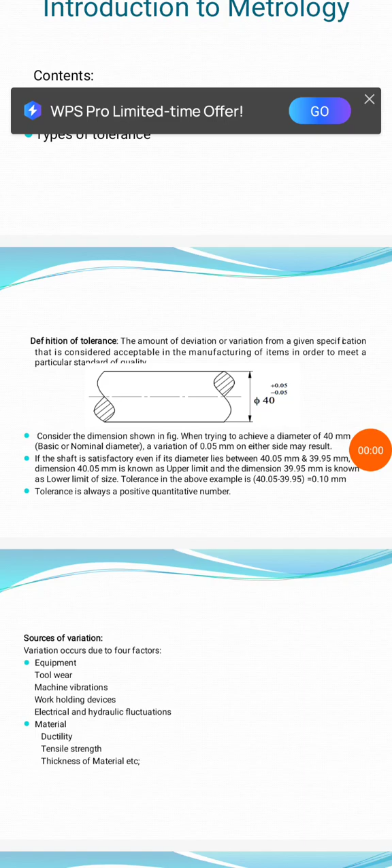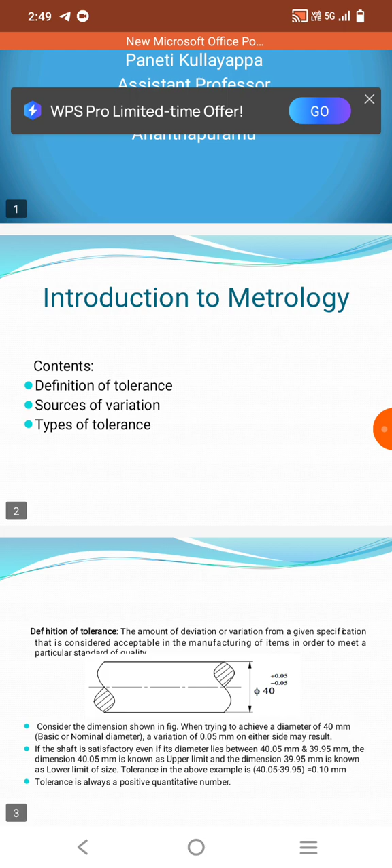I am going to tell you about introduction to metrology. In the introduction to metrology, first you should know what is the importance of metrology. Metrology deals with the measurement system, and we require measurement systems everywhere, and this measurement system ensures the quality of the product.

For example, all finished products have to be checked for their dimensions before they are installed. So we should check the dimensions of the product, and this is very important. We should ensure the quality, whether this particular product is within the prescribed dimensions or not. That's why we should study metrology.

Now coming to this particular class, I will cover three contents: one is the definition of tolerance, another is sources of variation, and the last point is types of tolerance. Before talking about the definition of tolerance, we should know...

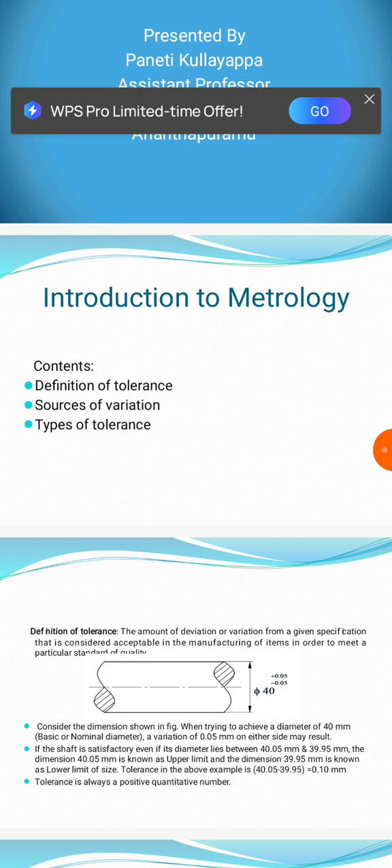For example, when you look at this particular figure, whenever you want to produce a cylindrical product with a diameter of 40 mm, as said earlier, we cannot exactly manufacture to 40 mm, so we allow some sort of variation or deviation.

For example, 40 plus or minus 0.05. For the upper limit, we will have 40 plus 0.05, that is 40.05 mm, and the lower limit for the product will be 40 minus 0.05, that is 39.95 mm. So the original diameter of the product, 40 mm, lies within this range. Though you produce n number of products within this range, 39.95 mm to 40.05 mm, the function of the product does not get affected.

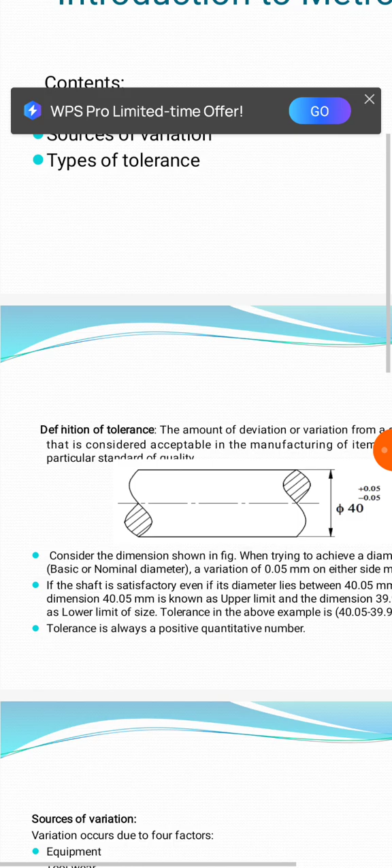So this is the importance of giving or providing tolerance for a particular product.

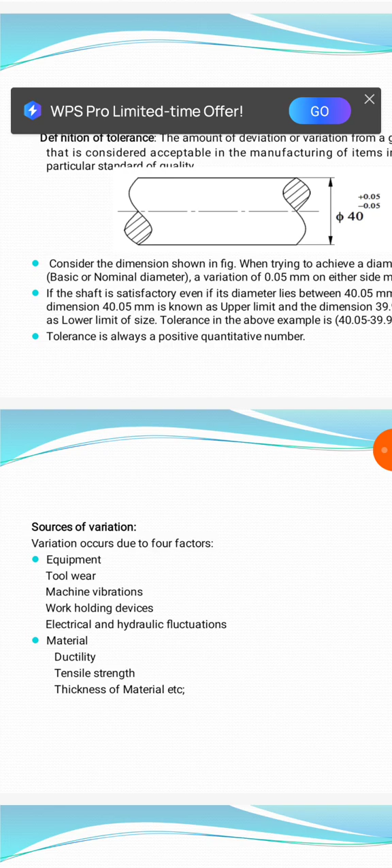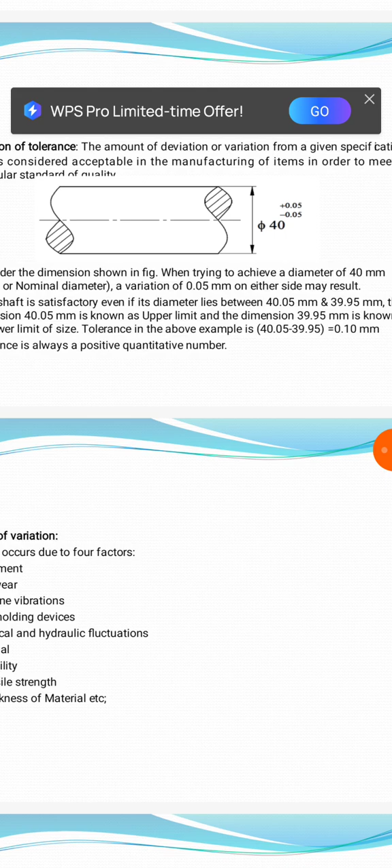Next, always remember one point: tolerance should always be a positive quantitative number. So the tolerance for this particular product in the example is taken as the difference between the lower limit and upper limit, that is 40.05 minus 39.95, that is 0.1 mm, and the tolerance value will always be a positive value. That is an important point to be noted.

Earlier we talked about it being unable to produce any product with exact dimensions. So we should know the reasons behind that, which are termed the sources of variation.

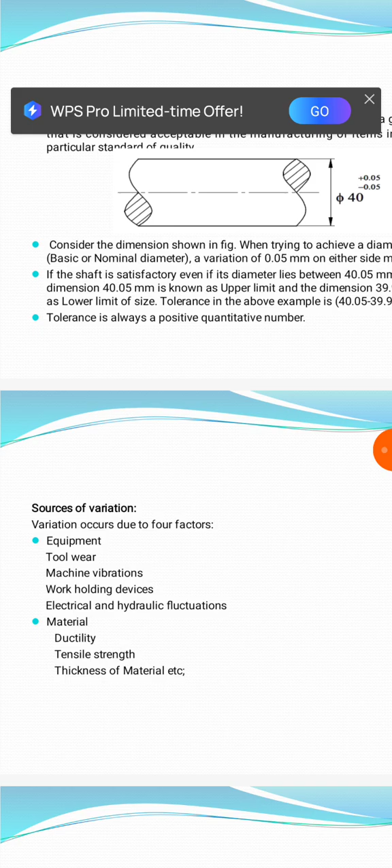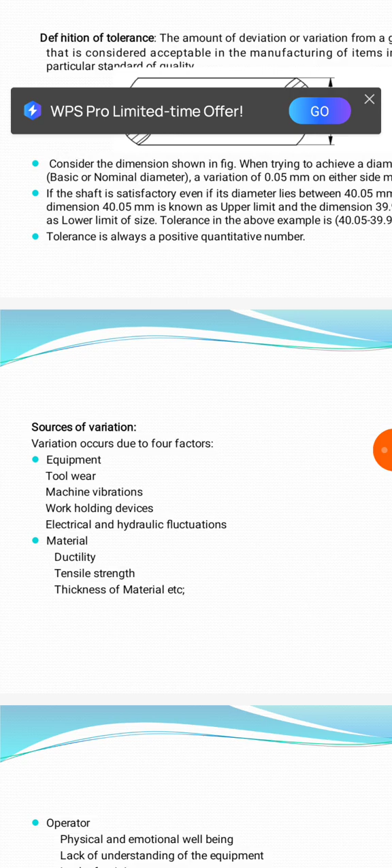With sources of variation, we should talk about 4 different types of sources that come into picture for the variation of any particular product. The first one is equipment, second is material, third is operator, fourth is environment. Apart from this, one more important point is the inspection equipment.

Now when we talk about equipment point of view, we should talk about a few important points related to the equipment. First is tool wear. As we already know, after running a machine for a particular period of time, the tool gets worn. Because of this tool wear, the required surface finish or required cutting does not come into picture, so this tool wear results in variation to a particular product.

Another point is machine vibrations. Because of higher or lower speeds, especially when we talk about very higher speeds, machine vibrations are resulted, and because of this, the surface finish of the product and the dimensions of the product are generally affected. So that is also one of the important considerations to talk about.

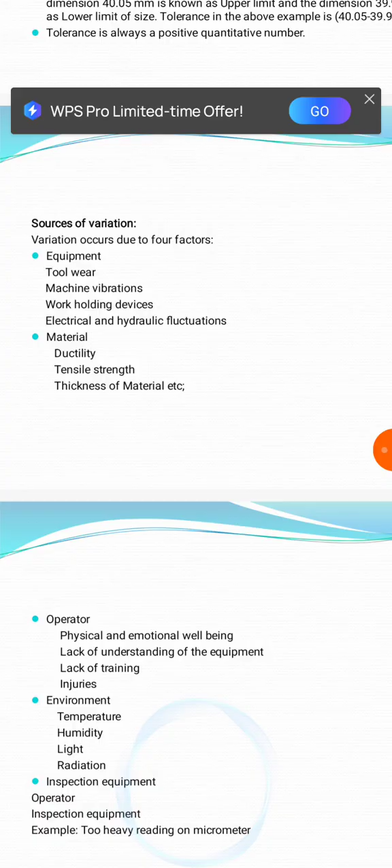Next we should talk about work holding devices. From the work holding devices point of view, how exactly you are going to fix the tool as well as the work part is very important. The accurate positioning of the tool and workpiece plays a very important role. If that is not done exactly, it produces variation in the dimensions of the product. Apart from that, electrical and hydraulic fluctuations lead to intermittent cutting of a product, which leads to dimensional variation.

The second point related to sources of variation is material. We should talk about material properties such as ductility, tensile strength, etc. We should design a product according to its strength and the required ductility. But whenever you take a different type of material, wrong selection of material plays a very important role and will lead to variation. Also the thickness of the material is one aspect - if the material size or properties taken are not as required, that leads to variation obviously.

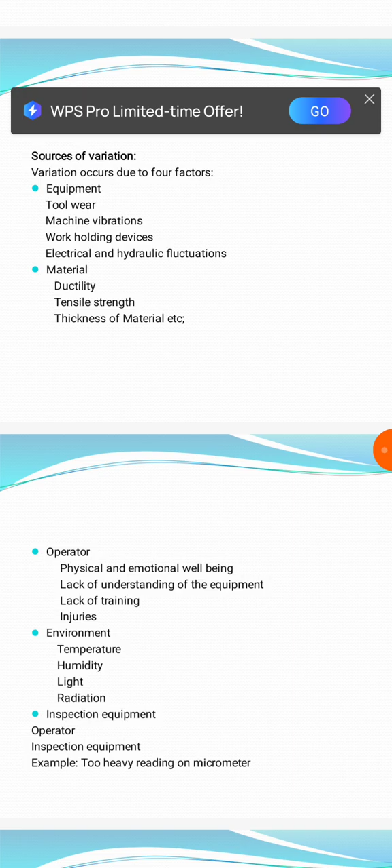Apart from that, the third point related to sources of variation is the operator. The operator should be physically and emotionally well. Because of exact physical condition and emotional control, only then will he operate the equipment according to the required conditions. If that does not happen exactly, it will lead to variation in the dimensions of a product. Apart from that, there is lack of understanding of the equipment, which might result from lack of training - both lack of training and lack of understanding of the equipment are mutually important to talk about.

So we call it lack of understanding of the equipment or lack of training, so that the operating procedure goes wrong, and dimensional variation comes into picture for a product. Apart from that, injuries may cause a lack of emotional control, so that a particular operator might not operate well, which leads to variation.

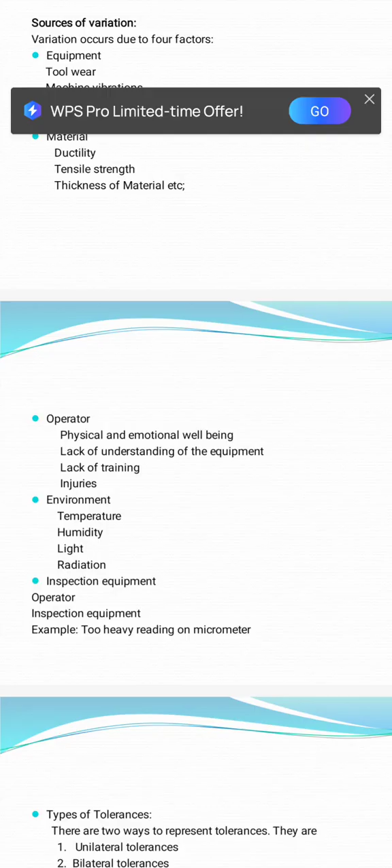Apart from that, the next point is environment. We should talk about temperature, humidity, light, and radiation under this category. For example, when we talk about temperature, engine parts are generally given a particular temperature limit. If we go beyond that limit and operate the engine beyond it, it leads to variation. Humidity, light and radiation also have similar effects - if not operated within the exact limit, it leads to variation.

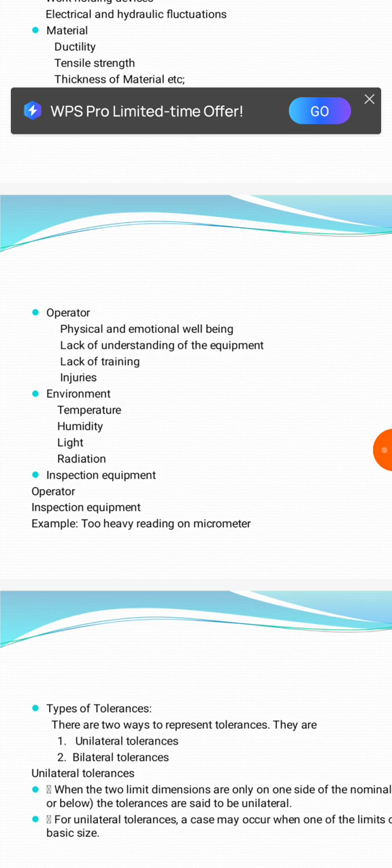Apart from this, we should talk about inspection equipment from the operator point of view. Different types of inspection equipment have different capabilities to measure a particular product, and the operator's understanding of this is very important. For example, too heavy a reading on a micrometer leads to measurement variation. This is also an important point in explaining why variation results for a particular product.

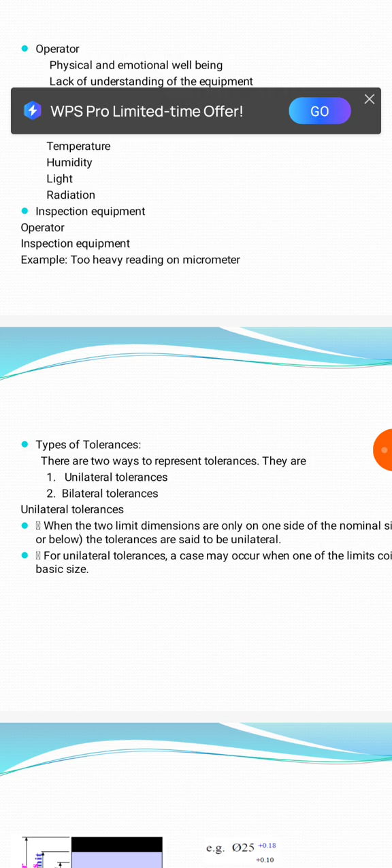Next, as already said, tolerance is the maximum allowable variation or deviation within which a particular product gives satisfactory performance. There are two ways to represent tolerances: unilateral tolerance and bilateral tolerance. Unilateral tolerances are those where the variation of the product is allowed only on one side of the limit.

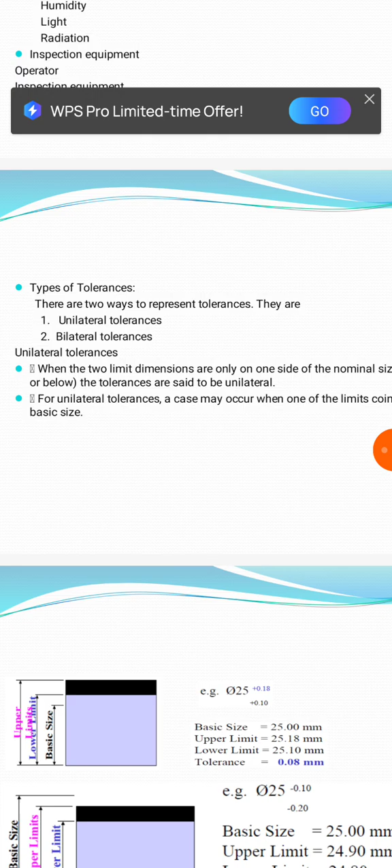It may be either a lower limit or upper limit—we allow variation on only one side of the limit, so that is called unilateral tolerance. For example, a 25 mm diameter with plus 0.1 and plus 0.18: the basic size, the exact required size, is 25 mm, while the lower limit of the product will be 25.10 mm and the upper limit is 25 plus 0.18, that is 25.18 mm. So we are allowing variation only on one side relative to the basic size, toward the upper limit.

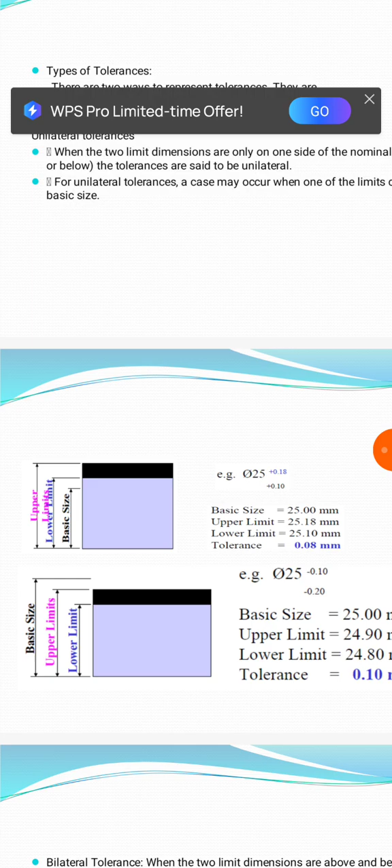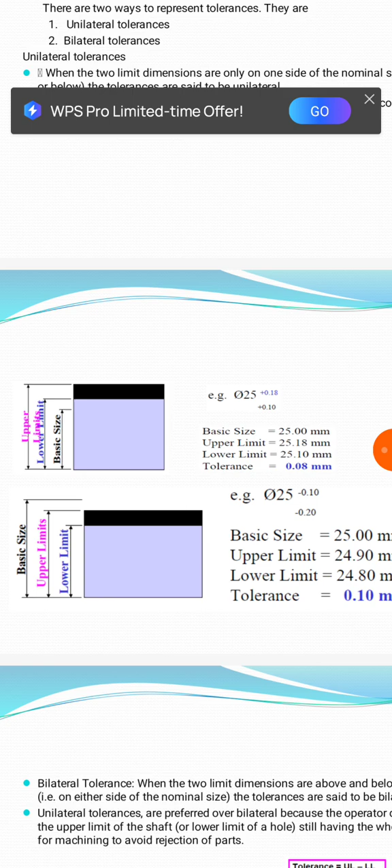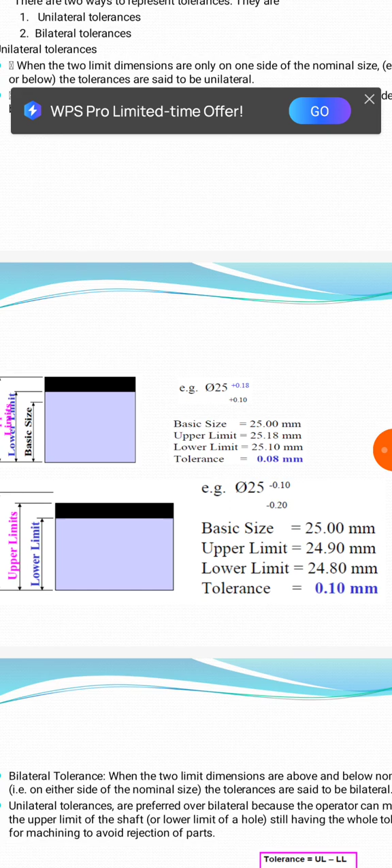Whereas when we want to produce a product with a diameter of 25 and allow minus 0.1 and minus 0.2, that is toward the lower side of the limit, the basic size will always be 25 mm, the upper limit will be 25 minus 0.1, that is 24.90 mm, and the lower limit will become 25 minus 0.2, that is 24.8 mm. The tolerance is upper limit minus lower limit, that is 0.1 mm.

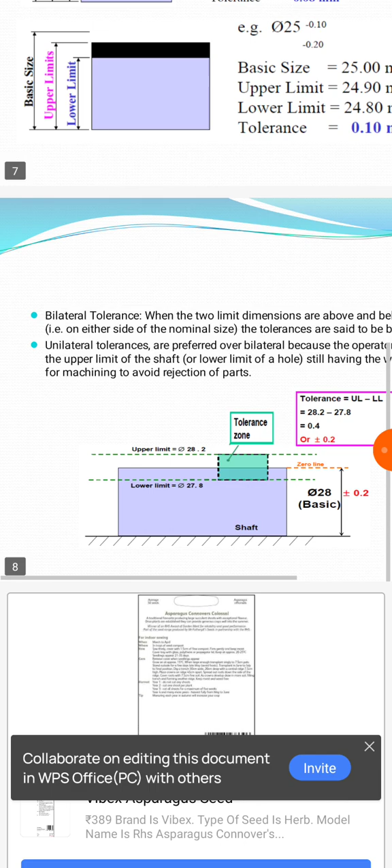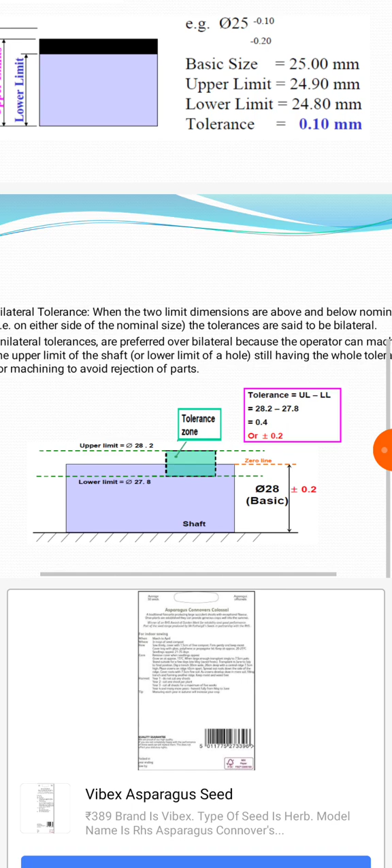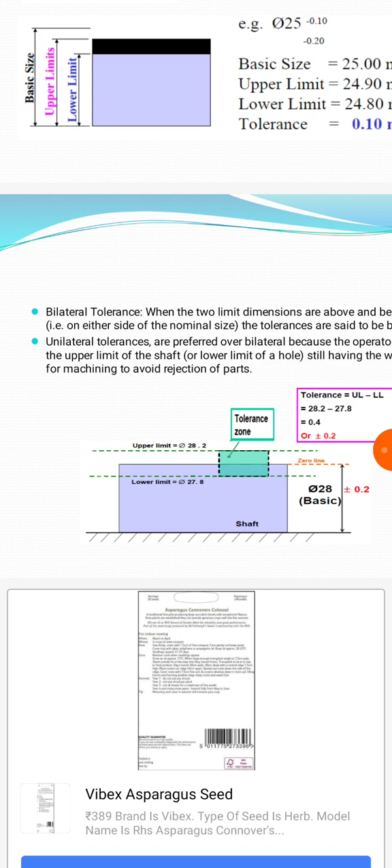Coming to bilateral tolerance: here we allow the variation or deviation on both sides of the limit, both the lower limit and upper limit. One important aspect to remember about unilateral and bilateral tolerance is that unilateral tolerance is much more preferred, because it is much easier to avoid rejection of parts during the measurement of particular dimensions.

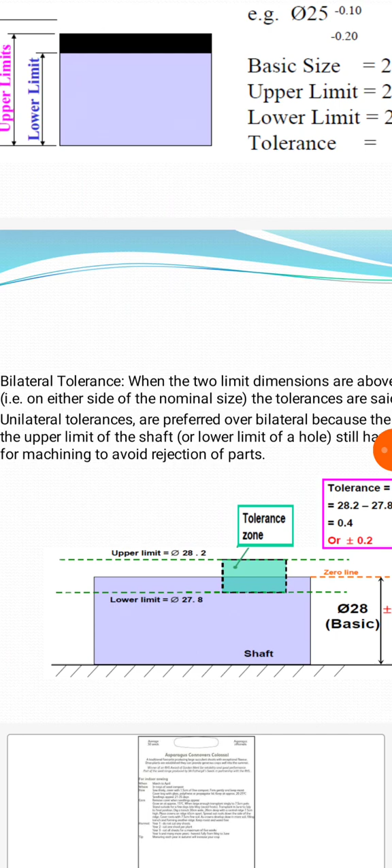For example, see the figure here: a 28 mm diameter plus or minus 0.2, which leads to an upper limit of 28 plus 0.2, that is 28.2 mm, while the lower limit is 28 minus 0.2, that is 27.8 mm. The tolerance will become, as said earlier, upper limit minus lower limit, that is 28.2 minus 27.8, that is 0.4 mm, or we can say plus or minus 0.2 mm. This means we allow the variation or deviation for the product on both sides of the nominal size, and we represent the product accordingly.

So thank you. This is a brief introduction related to what is called metrology, the importance of metrology, the definition of tolerance, what is called variation, and what are the sources for variation, and lastly the types of tolerance—we talked about unilateral and bilateral tolerances. Thank you.